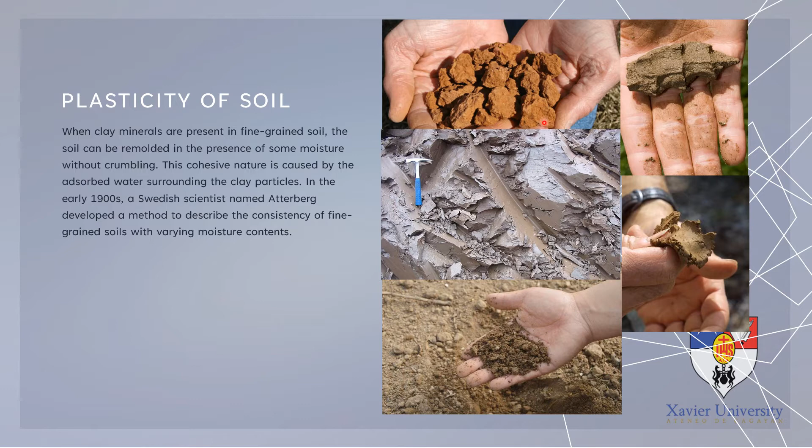So you also have here an example of a consistency of soil. You also have here, it looks like a solid. The soil has appeared like a solid in here as well as in here. So at a very low moisture content, soil behaves more like a solid. When the moisture content is very high, the soil and water may flow like a liquid.

So hence, on an arbitrary basis, depending on the moisture content, the behavior of soil can be divided into four basic states. We have the solid, the semi-solid, the plastic, and the liquid. So we can see here the first state of the soil is the solid. It still has a resistance to stress. It still can withstand a load.

And then as the moisture content increases, along with this line, what if the moisture content reaches its shrinkage limit?

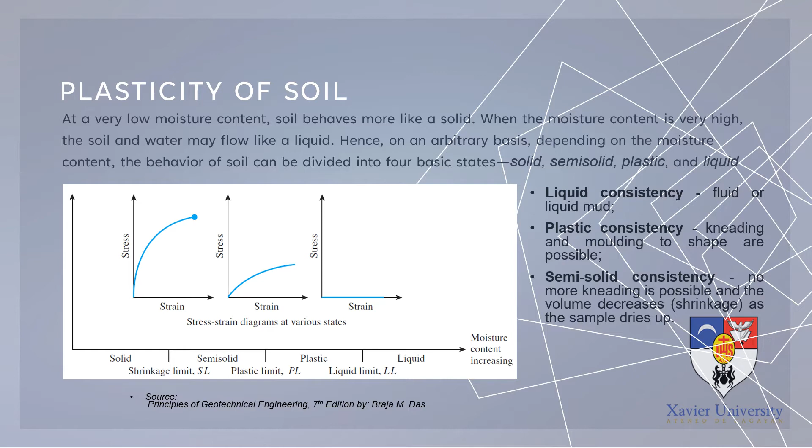Okay, we have the Atterberg limit. So let us talk about what are the Atterberg's limits. We have the liquid limit, the plastic limit, and shrinkage limit as mentioned on the previous slide. So what are these limits, who have established them, and what are their uses?

So the consistency and behavior of a soil is different, as are the engineering properties, at varying degrees of moisture content. Thus, the boundary between each state can be defined based on a change in the soil's behavior. Atterberg limits can be used to distinguish between silt and clay and to distinguish between different types of silts and clays. These limits and tests were developed by Albert Atterberg.

He is a Swedish agriculturist, and the limits were later refined by Arthur Casagrande. So two people, two great men, have contributed to the establishment of these limits. These tests can be used in evaluating various soils, which will ultimately have structures built upon them.

So soils, when wet, retain water, and some expand in volume. The amount of expansion of a soil is related to its ability to absorb water and its structural makeup. So Atterberg tests are mainly used on clayey or silty soils, since they are the soils most affected by expansion and shrinkage due to varying moisture contents.

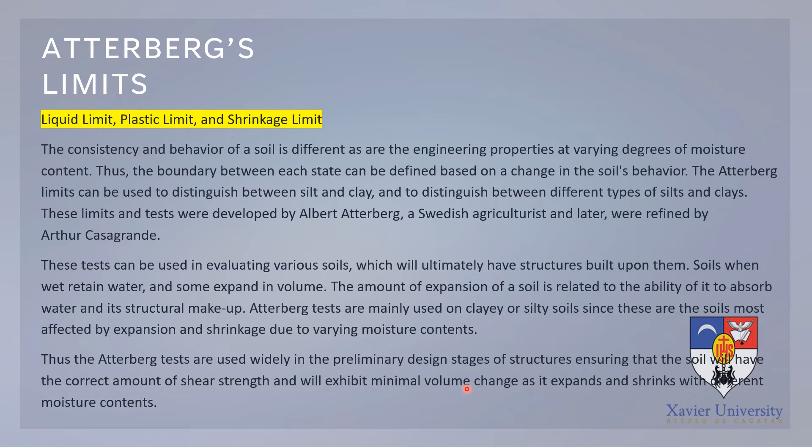Kay fine-grained soils are very sensitive to changes in moisture content, so their behavior mainly relies on their moisture content. That's why our job is to make sure nga the soil only has its correct or enough moisture content so that it does not become liquid or change its volume. That is the purpose of the Atterberg limits test.

So let us talk about the first of the Atterberg limits, the plastic limit. It is the percentage moisture content at which a soil changes with decreasing wetness from the plastic to semi-solid consistency, or with increasing wetness from semi-solid to the plastic consistency.

For the conduct of the plastic limit test, we follow the standard test method set by the ASTM, test code D4318. ASTM stands for American Society for Testing and Materials. This code provides us the standard procedures that we have to follow in the conduct of our plastic limit test.

The plastic limit test involves rolling out a thread of the fine portion of the soil on a flat, non-porous surface. So mura kag maglugod, or i-roll nimo ang soil on a flat surface. For this, we use a glass. Atong gagamitin is kanang bildo lang siya nga flat, a glass plate, and then dito nato lukuton ang soil.

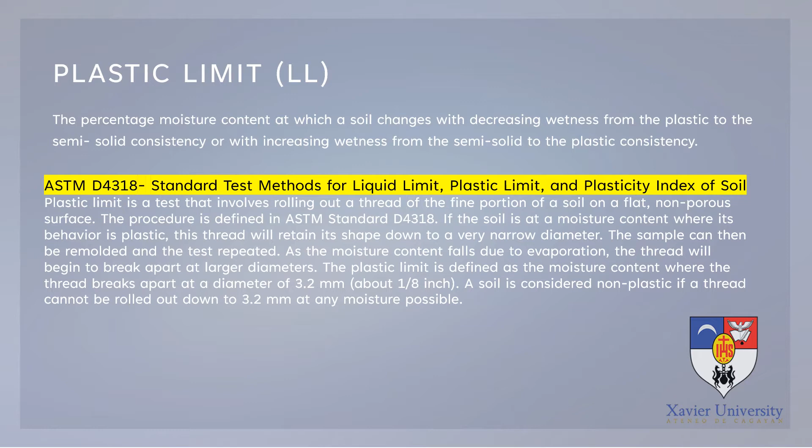Alright, so now we have here the apparatuses that we need for the conduct of the plastic limit test. We have the graduated cylinder, a glass plate which is flat glass, and we also have the spatula, the moisture can, and the mixing bowl.

Here we mix the soil and water using the spatula. Then on this glass plate we roll the soil. If we are already able to roll our thread of soil into the diameter of 3.2 millimeters, we will take a sample out of that thread and put it into our moisture can for the determination of the moisture content.

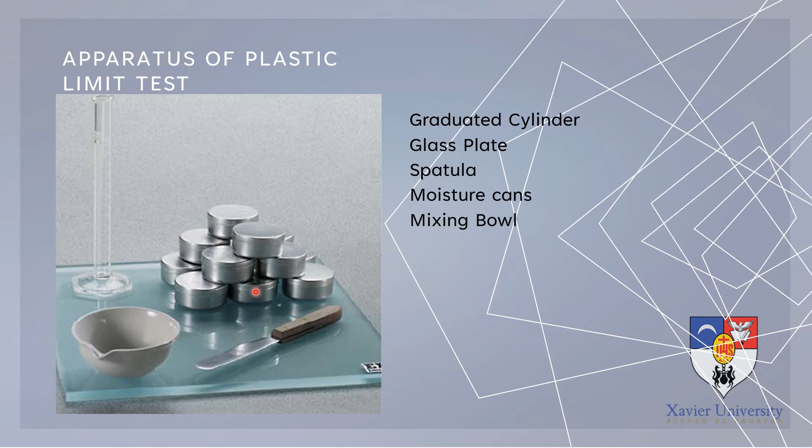For the determination of the moisture content, we can still use the oven drying method, and that moisture content of the soil will be the plastic limit of the soil sample.

So let me present to you a brief overview of what the procedure at the plastic limit will be about. As I mentioned, you roll the soil into a thread, and you will aim to roll it into the diameter of 3.2 millimeters.

So we take about 8 grams of this plastic soil mass and roll it between fingers and the glass plate with just sufficient pressure to roll the mass into a thread of uniform diameter throughout its length. The rate of rolling shall be between 80 to 90 strokes per minute. Continue rolling until you get a thread of 3 millimeters diameter, or 1/8 inch.

Casagrande defined the plastic limit as the water content at which a thread of soil just crumbles when it is carefully rolled out to a diameter of 3 millimeters, or 3.2. If the thread crumbles at a diameter smaller than 3 millimeters, the soil is too wet.

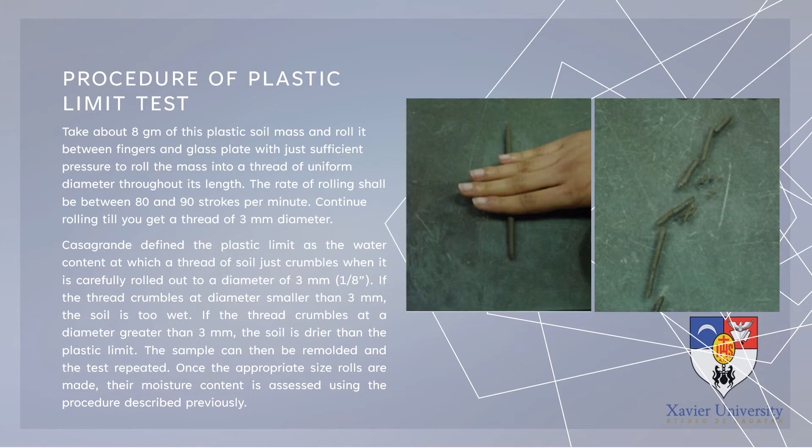If the thread crumbles at diameter greater than 3 millimeters, the soil is drier than the plastic limit, so the sample can be remolded and the test repeated. Once the appropriate size rolls are made, their moisture content is assessed using the procedure described previously, the oven drying method. Now let us talk about the liquid limit test.

This is the second limit by Atterberg. Liquid limit is the water content where the soil starts to behave as a liquid. It is measured by placing a clay sample in a standard cup and making a separation, or a groove, using a spatula. The cup is dropped till the separation vanishes, and the water content of the soil is obtained from the sample.

The standard test method for this test is still ASTM D4318. The liquid limit test defined in ASTM D4318 determines the water content at which the behavior of a clayey soil changes from plastic to liquid. However, the transition from plastic to liquid behavior is gradual over a range of water contents, and the shear strength of the soil is not actually zero at the liquid limit.

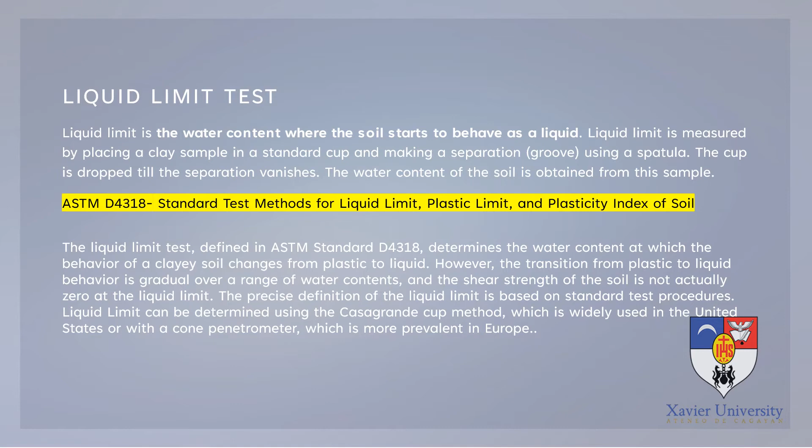So the precise definition of the liquid limit is based on standard procedures. Liquid limit can be determined using the Casagrande cup method, which is usually used in the United States, or with a cone penetrometer, which is more prevalent in Europe. So there are two ways to determine the liquid limit of a soil: through the Casagrande cup and through the cone penetrometer. I will discuss the Casagrande cup method.

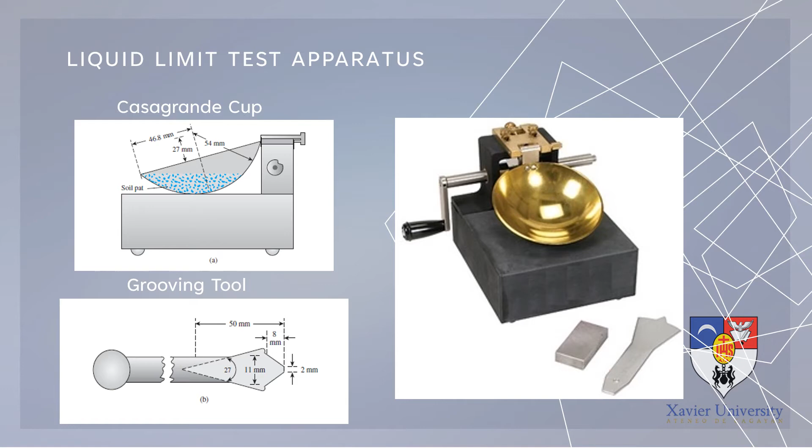The other apparatus that we will be needing aside from the Casagrande cup and the grooving tool are the graduated cylinder, for us to be able to measure the water, the spatula, and the mixing bowl, which will allow us mixing of the soil sample and the water, and also the moisture can for the determination of the moisture content.

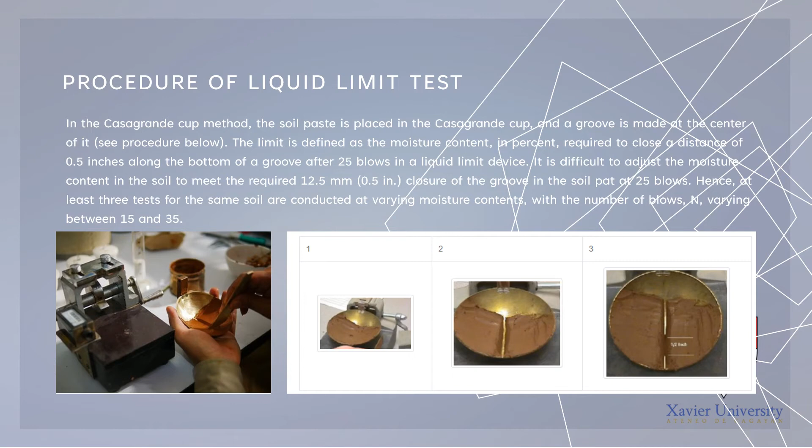After that, cut the groove at the center using the tool. Lift the cup and drop it a height of 10 millimeters using the crank-operated cam. Measure the water content required to close the groove to that distance. Then repeat the procedure at least 3 times.

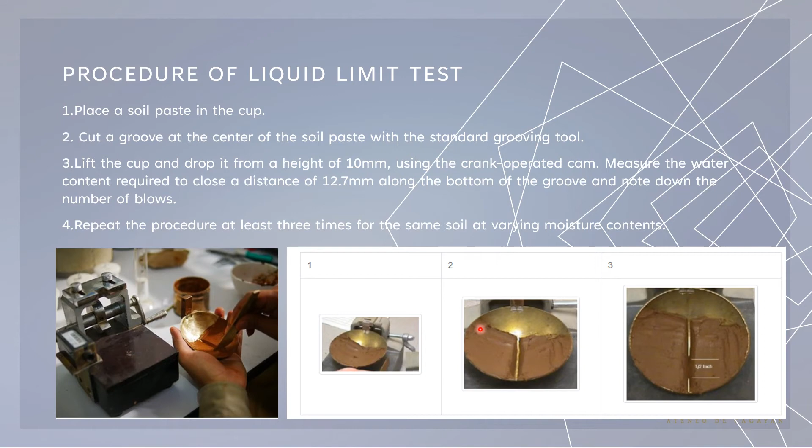So you just have to record that, and then plot the moisture content of the soil in percent and the corresponding number of blows on a semi-logarithmic graph. Draw the best fit straight line through the plotted points. The moisture content corresponding to N25, determined from the curve, is the liquid limit of the soil.

Let me show you how, for example, at 15 blows it closes. The x-axis is the number of blows, and the y-axis is the corresponding moisture content. So for example, we recorded that at 15 blows it closed on the first trial, so you plot the corresponding moisture content.

And you recorded the next trial, after the trial for 15 blows, you added more water to the soil, put it back in the Casagrande cup, and after repeating the procedure, the groove closed at 20 blows. So that's the corresponding moisture content here.

And then, after your second trial, you added more water to the soil sample again, repeated the procedure, and noticed that the groove closed again at 40 blows. So you graph that on the semi-logarithmic graph, and then project the moisture content at 25 blows. You project it there, and the moisture content corresponding to that will be the liquid limit of our soil.

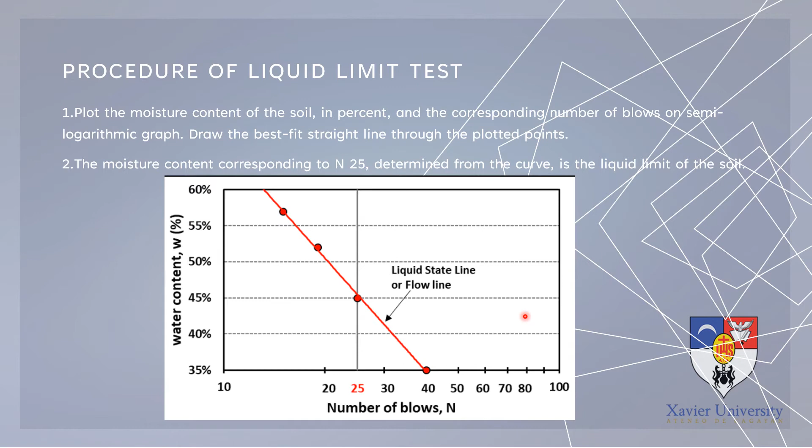Although there is a calculator technique for interpreting this data, I will be discussing it with you in our upcoming synchronous session.

Okay, aside from those two, we also have the plasticity index, also a plasticity property of soil. But for this part, we don't have a test to conduct, so we'll just use a formula instead.

So first let us talk about what plasticity index is. Plasticity index is expressed in percent of the dry weight of the sample. It shows the size of the range of moisture contents at which the soil remains plastic. In general, the plasticity index depends only on the amount of clay present. It indicates the fineness of the soil and its capacity to change shape without altering its volume. A high plasticity index indicates an excess of clay or colloids in the soil.

Its value is 0 when the plastic limit is greater than or equal to the liquid limit. The plasticity index also gives a good indication of compressibility — the greater the PI, the greater the soil compressibility. So the plasticity index is simply the difference between the liquid limit and the plastic limit of soil.

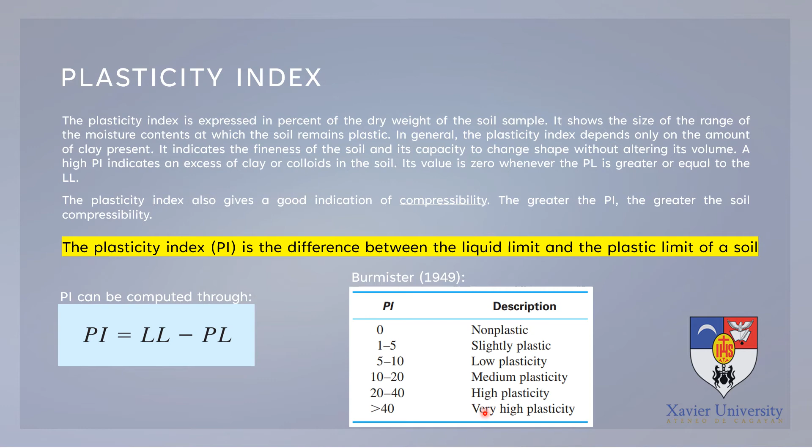So we also have another type of limit from the Atterberg's provision. It is what we call the shrinkage limit. So makita man nato kaganyan, no? We have the liquid limit and the plastic limit which we have already discussed. We also have the shrinkage limit.

So soil shrinks as moisture is gradually lost from it. With continuing loss of moisture, a stage of equilibrium is reached at which more loss of moisture will result in no further volume change. So the moisture content in percent at which the volume of the soil mass ceases to change is defined as the shrinkage limit.

So makita nato diri no, the volume is on the y-axis, and then the moisture content is on the x-axis. So for example, this is considered as volume final, the solid phase of the soil. As the moisture content increases, at the shrinkage limit dili siya mag-change ang volume sa atong soil. From the solid, the volume has remained constant throughout the increase of the moisture content.

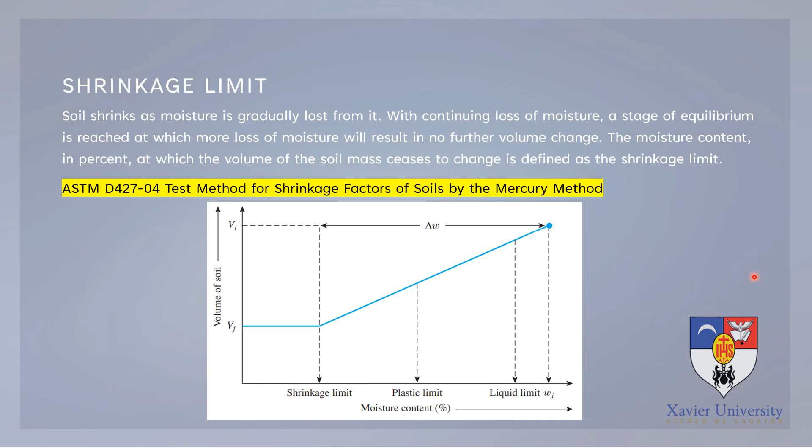However, the standard procedure for determination of our shrinkage limit is different from the Atterberg's limit test, which is the ASTM D4318. And this one, the test method for shrinkage factors of soils by the mercury method, the standard is ASTM D427-04. So this provision indicates the standard procedures that we need to comply with in order to conduct our shrinkage limit test.

So let me give you an overview of the shrinkage limit test. Shrinkage limit tests are performed in the laboratory with a porcelain dish about 44 millimeters in diameter and about 12.7 millimeters high. The inside of the dish is coated with petroleum jelly and is then filled completely with wet soil. Excess soil standing above the edge of the dish is struck off with a straight edge. The mass of the wet soil inside the dish is recorded.

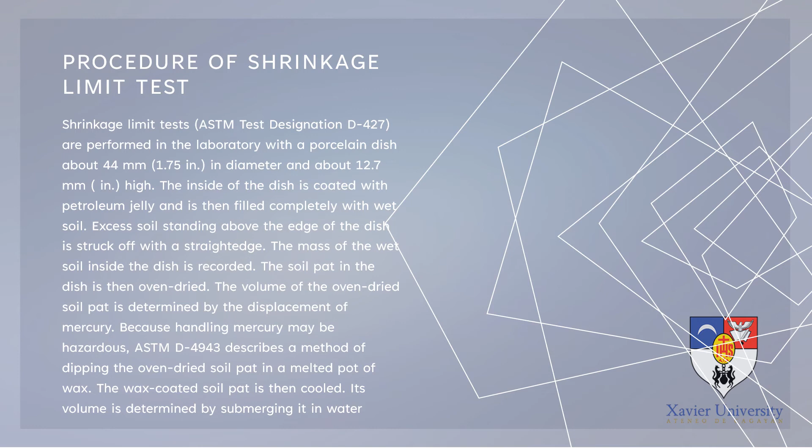The soil pat in the dish is then oven-dried. The volume of the oven-dried soil pat is determined by the displacement of mercury. Because handling mercury may be hazardous, ASTM D4943 describes a method of dipping the oven-dried soil pat in a melted pot of wax. The wax-coated soil pat is then cooled. Its volume is determined by submerging it in water.

So mao ni siya ang soil pat before drying, and then after drying ni-shrink na siya. There is a change in the soil mass and a change in volume. The initial volume and initial mass, M1, and then the soil volume is now V final and the soil mass is M2.

We just have to use this formula to compute our shrinkage limit. So M1 minus M2 over M2, the initial mass and the final mass after drying, multiply that by 100, minus the volume initial, volume before drying, minus the volume final, the volume after drying, divided by M2, multiplied by the density of water times 100, and the outcome from this formula will be our shrinkage limit for the soil.

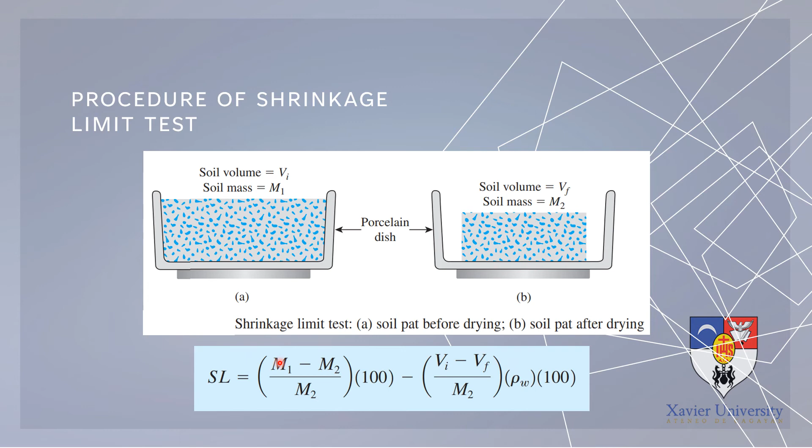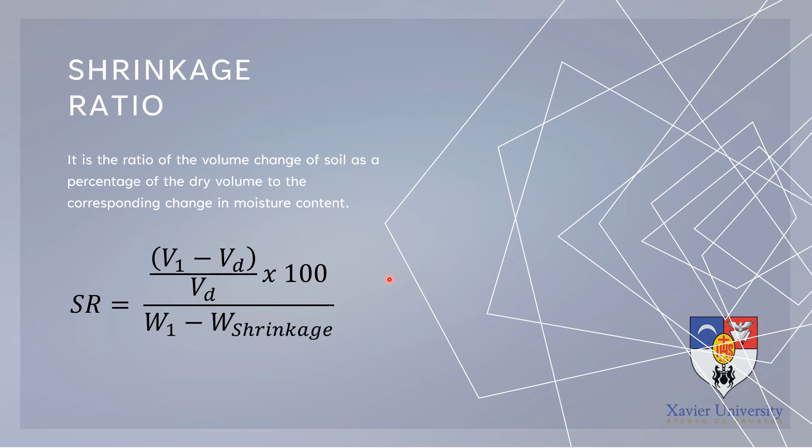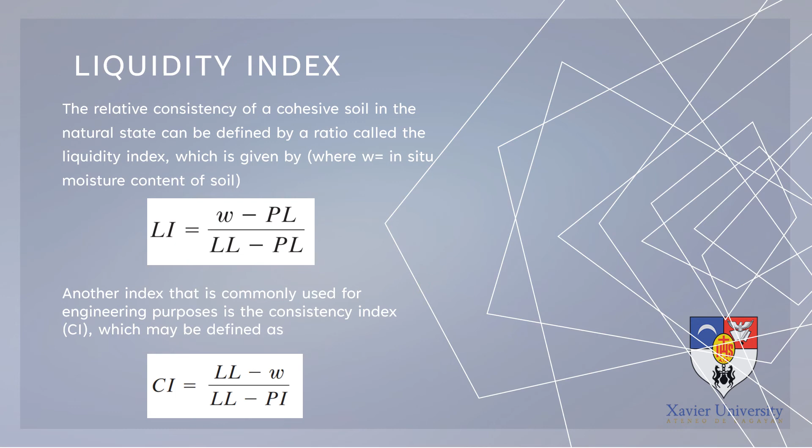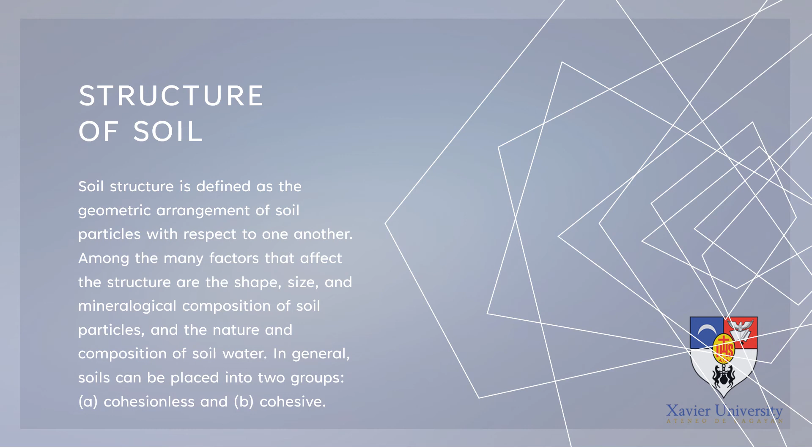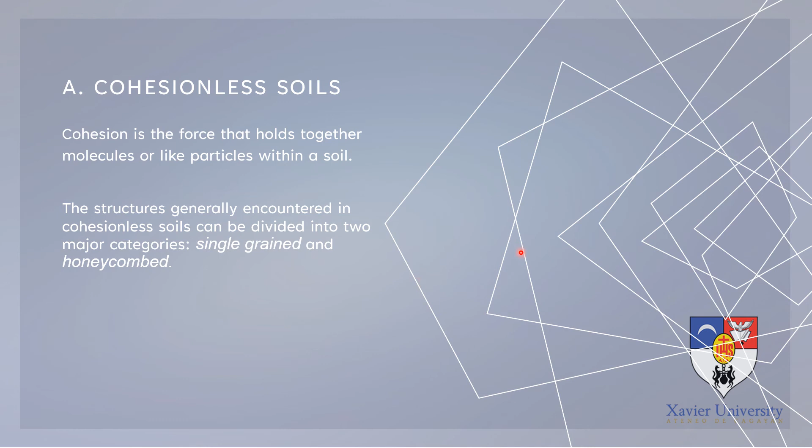So let us first talk about cohesionless soil. Let us first define what is cohesion. Cohesion is the force that holds together molecules or like particles within a soil. The structures generally encountered in cohesionless soils can be divided into two major categories: the single-grained and the honeycomb. Single-grained structures, mo ni siyang nagkandalain-lain nga arrangement sa soil particles. So they have their name, and they have been classified into different structures. Single-grained structures are present in cohesionless soils like gravel and sand.

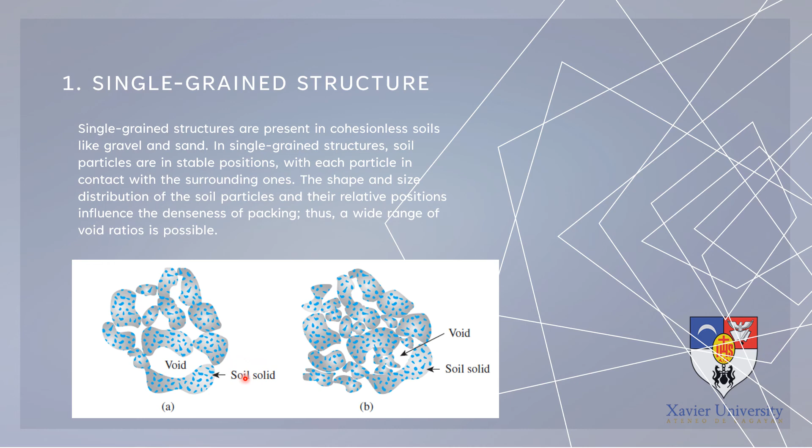In single-grained structure, soil particles are in stable positions, with each particle in contact with the surrounding ones. The shape and size distribution of the soil particles and their relative positions influence the denseness of packing. Thus, a wide range of void ratios is possible. So it could be this one, no? There are a lot of voids, and in this illustration as well, ay pod ang positions sa mga soil particles. So nagkadepende sa iyahang arrangement pod ang void ratio nga possible nga ma-create.

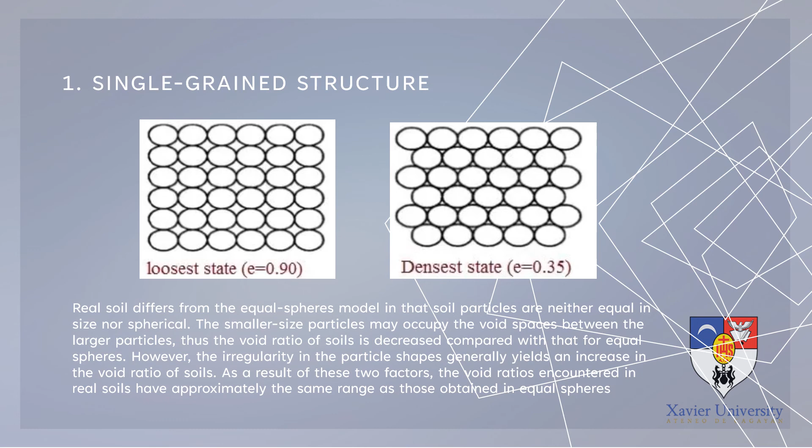The second type of structure for the cohesionless soil is the honeycomb. In soil, the honeycomb structure is composed of particles ranging in size from 0.02 to 0.002 mm. Sa pino na kaya na sila, no? Which are often fine sands or silts. Allowing this sort of dirt to settle on the ground causes the particles to attract one another and form a bridge of particles. Additionally, a big void is created between those bridges, which results in extremely loose soil in nature.

The attraction of the particles is owing to their cohesion, but this cohesion is only relative to their size, and thus these soils are not naturally plastic. When water is introduced to dry fine sand, bulking of the sand occurs, which is nothing more than a honeycomb structure. Static load capacity of the honeycomb structured soil is restricted.

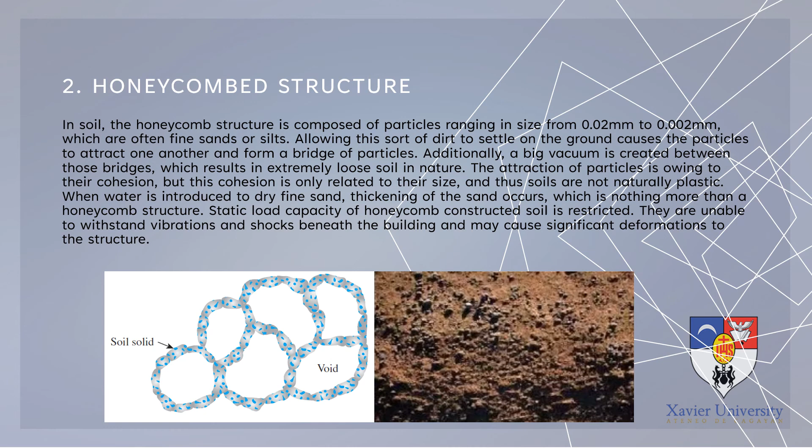They are unable to withstand vibrations and shocks beneath the building and may cause significant deformations to the structure. So now let us talk about the cohesive soil. Kay cohesionless mo no? This time we will be talking about the cohesive soil.

So to understand the basic structures in cohesive soils, we need to know the type of forces that act between clay particles. So when two clay particles in suspension come close to each other, the tendency for interpenetration of the diffuse double layers results in repulsion between the particles. At the same time, an attractive force exists between the clay particles that is caused by van der Waals forces and is independent of the characteristics of water.

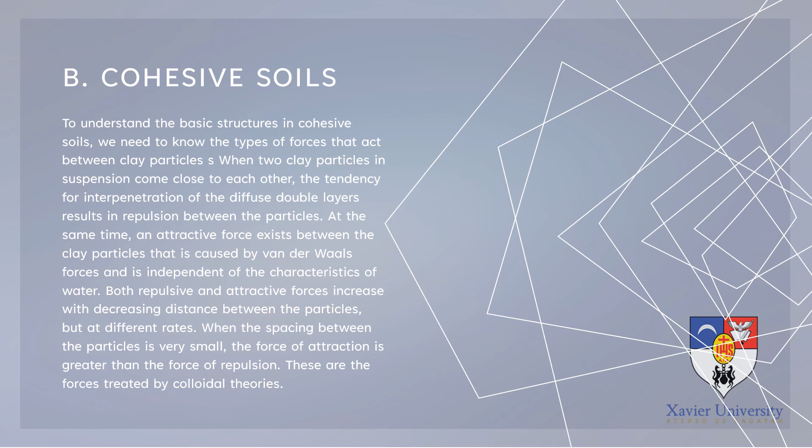Both repulsive and attractive forces increase with decreasing distance between the particles but at different rates. So when the spacing between the particles is very small, the force of the attraction is greater than the force of the repulsion. So these are the forces treated by colloidal theories. So local concentrations of positive charges occur at the edges of the clay particles. When the clay particles are very close to each other, the positively charged edges can be attracted to the negatively charged faces of the particles.

Let us consider the behavior of clay in the form of a dilute suspension. So when the clay is initially dispersed in water, the particles repel one another. So this repulsion occurs because at the larger interparticle spacing, the forces of repulsion between the particles are greater than the forces of attraction. So the force of gravity on each particle is negligible. Thus, the individual particles may settle very slowly or remain in suspension.

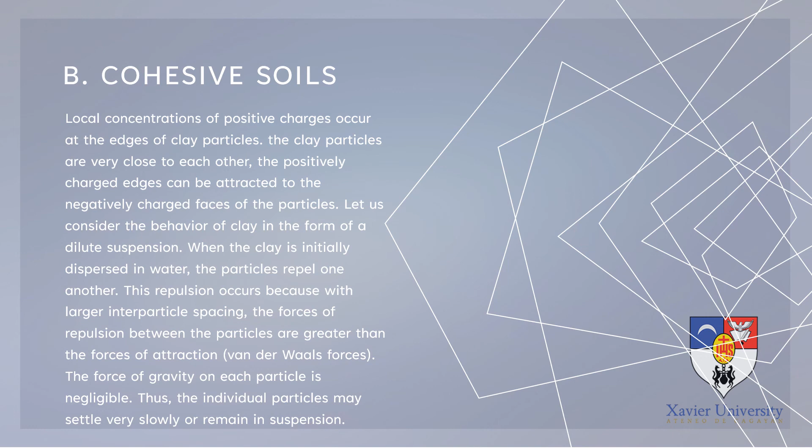So there are different types of structures for our soil and the cohesive type of soil. So let us first talk about the dispersed structure of soil. So the sediment formed by the settling of the individual particles has a dispersed structure, and all particles are oriented more or less parallel to one another. So mo ni siya may tabo daw sa structure of the soil when diluted no in water. Mo na siya.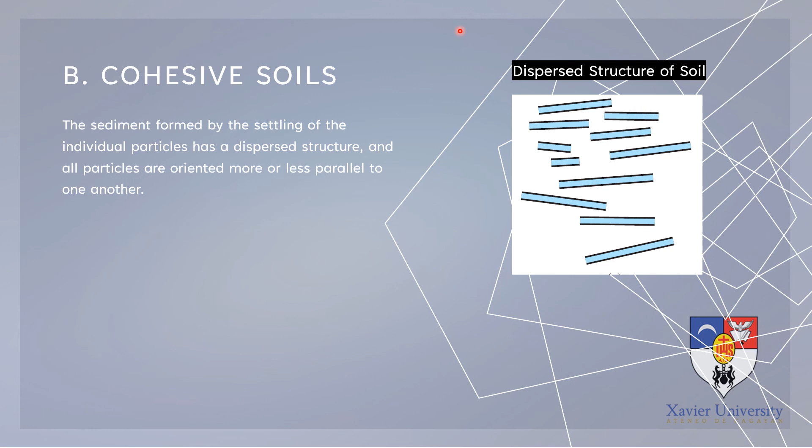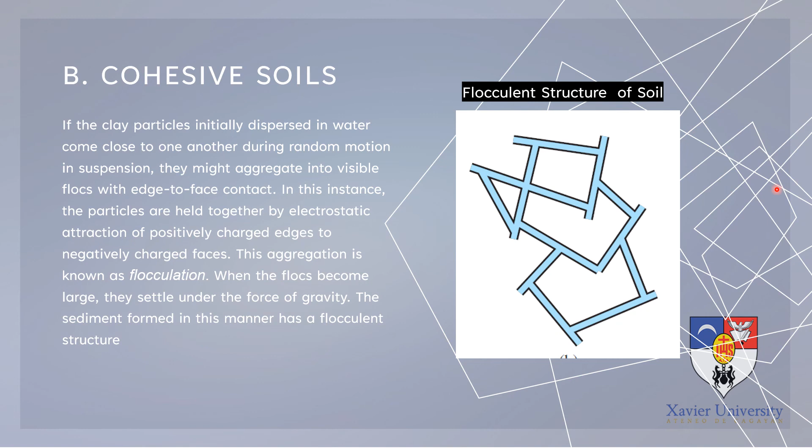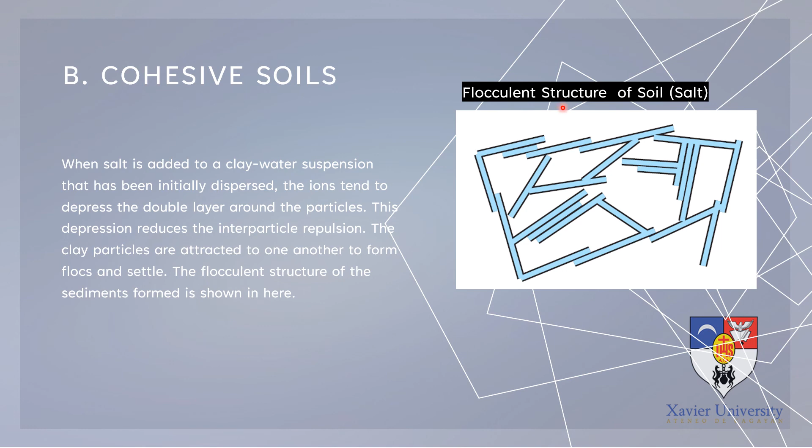So let us talk more about clay because most of the time clays are considered to be a cohesive soil. So clays that have flocculent structures are lightweight and possess high void ratios. So clay deposits formed in the sea are highly flocculent. Most of the sediment deposits formed from fresh water possess an intermediate structure between dispersed and flocculent. So a deposit of pure clay minerals is rare in nature. So when a soil has 50% or more particles with sizes of 0.002 millimeters or less, it is generally termed clay.

So studies with scanning electron microscopes have shown that individual clay particles tend to be aggregated or flocculated in submicroscopic units. So these units are referred to as domains. The domains then group together and these groups are called clusters. Clusters can be seen under a light microscope. So this grouping to form clusters is caused primarily by interparticle forces. The clusters in turn group to form peds. Now, peds can be seen without a microscope.

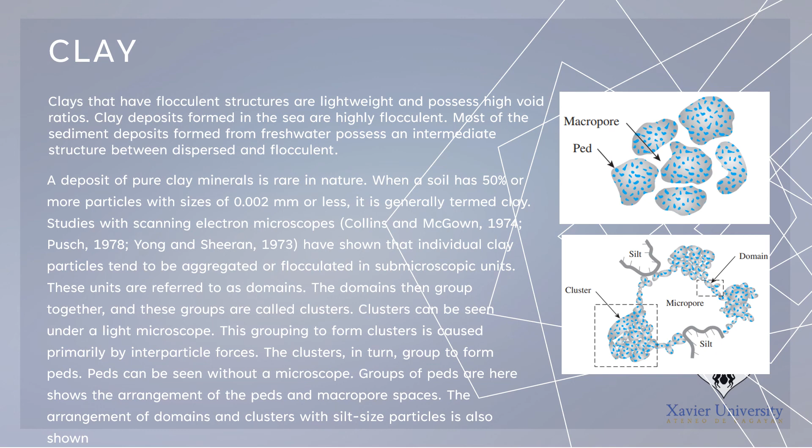Groups of peds are here, showing the arrangement of the peds and macropore spaces. So the arrangement of domains and clusters with silt-sized particles is also shown. So we have here silt. So I guess that would be all for the discussion of the plasticity and structure of soil.